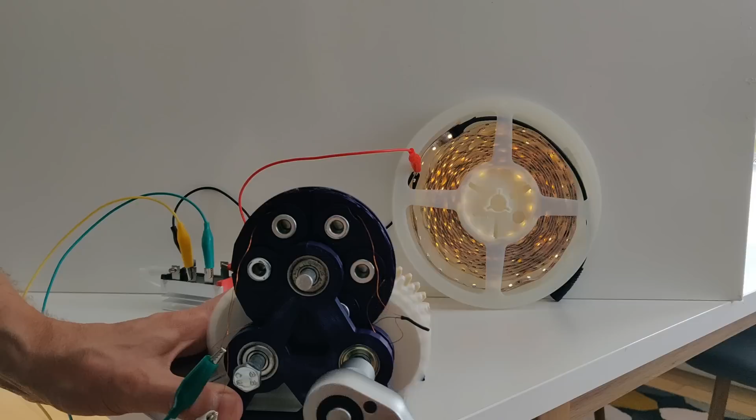In this video, I'll demonstrate how to build a 12 volt generator, just like this, from easily accessible parts, most of which you can get for free. It's a video meant for beginners, so I'll demonstrate the build process as well as go through the basics of how and why it works. Let's get started.

Here's the part where I talk about how and why it works. Please note how this video is split into different chapters. You can easily skip this part if you know all you need to know about electromagnetic induction.

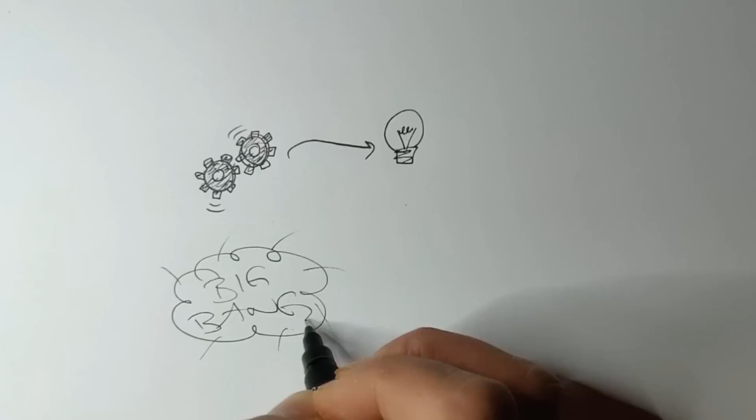A generator creates electricity from a mechanical motion, in this case of our generator, the turning of the gears and rotor across the stator. When we say we create electricity, it sort of implies that we create something where before there was nothing. But all we really do is turn one kind of energy into another. All energy in the universe was created at the time of creation, and all we've done ever since, and probably ever will do, is turn one kind of energy into another kind.

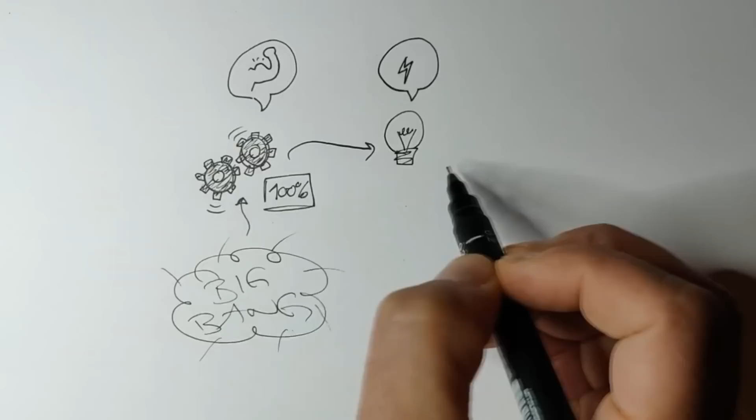In this case, we turn our physical input into an electric output, so we can also think of a generator as an energy translator, in much the same way as a motor translates electrical energy into movement. We can never get more energy output than what we put in. That's just the way the laws of physics govern. We can only try to minimize the energy loss in the generator between the input and the output, and there will always be some energy loss. Again, the laws of physics at work.

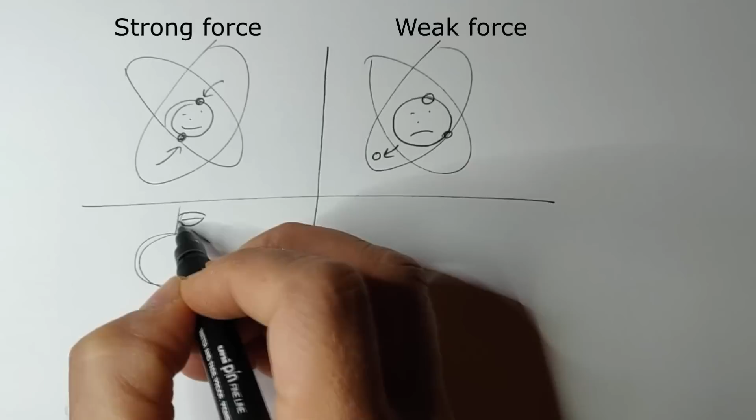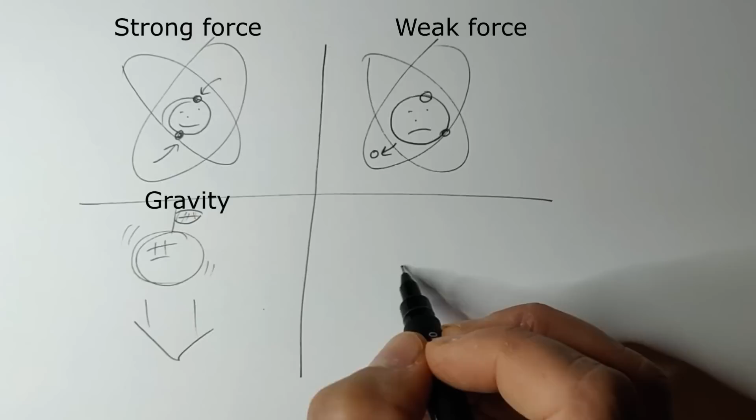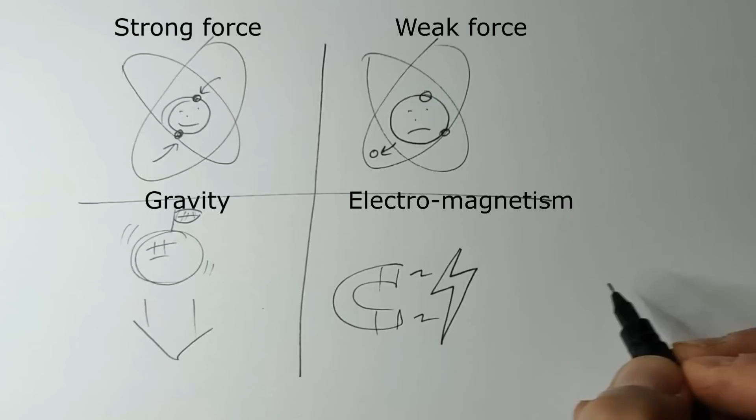The forces at play in converting our physical movement into electricity is known as electromagnetism, and it's one of 4 fundamental forces of nature that govern how the entire universe works. You have the strong force that determines how fundamental particles in atoms are bound together, or the weak force that determines how they decay in microseconds or millennia. And of course, we have gravity that dictates how everything else aligns together, from vast galaxies to apples falling from trees. And then you have electromagnetism that basically governs how everything else interacts. The principle we're most interested in, generator-wise, is known as electromagnetic induction.

Electromagnetic induction works by creating a changing magnetic field around an electric conductor. The easiest way to demonstrate this is by moving a magnet back and forth across a wire coil. Inside the wire we'll have a bunch of atoms, and these atoms have a core, a nucleus it's called, and this nucleus has a bunch of electrons that whirl around it, and this creates a tiny magnetic field. You don't intrinsically get electricity from just the wire itself, because the electrons spin in random directions and their magnetic forces cancel each other out. So until a magnet comes along, it's just a boring coil.

Magnets have their molecules arranged so that their electrons spin in the same direction. This creates a uniform magnetic field, and when we move a magnet across a wire, all those electrons in the magnet will push, or induce if you will, the electrons in the wire to move in the way of the magnet. Some of those electrons will be pushed loose from the atoms, and it's this displacement of all those free-roaming electrons that ultimately creates the electricity. All this is vastly simplified, of course, but that's basically the idea.

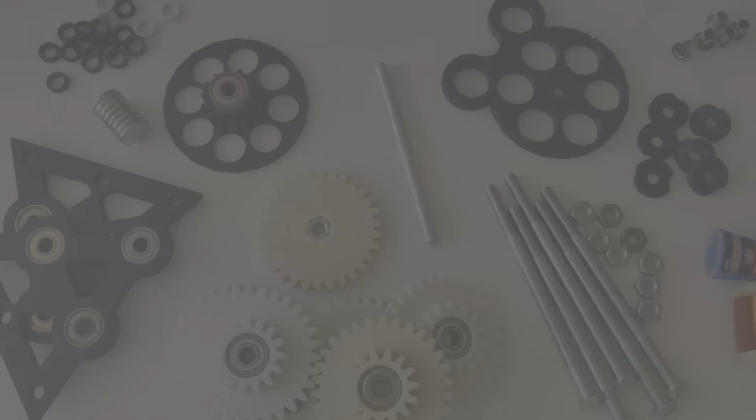First, the parts. 3D printed gears. 6 of them are so-called compound gears, which means they're actually 2 gears joined together, a small one and a big one. Each gear needs 2 bearings. Later in the video I'll show how to get these for cheap or even free. One initial gear is not a compound gear, it's just a single spur gear. This one doesn't need a bearing. Instead there's room for a hex nut, an M8 hex nut to be exact, in the middle of it.

This gear is the one that sets all the other gears into motion, and it's set with a hex nut in the middle so as to hold tight onto the bolt that makes up one of the two shafts of the gearbox. You'll get the idea later on when we assemble it, but basically I'm using bolts that aren't fully threaded to stop the hex nut from traveling too far up the bolt.

And the reason why I do this is because this gear needs to be fixed to the shaft, and this is usually done by drilling through the shaft and inserting a pin through it. But that's just very hard to do precisely if you don't have access to a decent stationary drill press. But most people don't, and it can be a difficult and error-prone process. So this is an easy way to avoid that problem altogether.

5 M8 times 130 millimeter partially threaded bolts. To be exact, they should be quarter threaded, meaning 28 to 30 millimeters of thread on the bolt. These should be readily available at your local hardware store. An 8 millimeter push rod will do just as well.

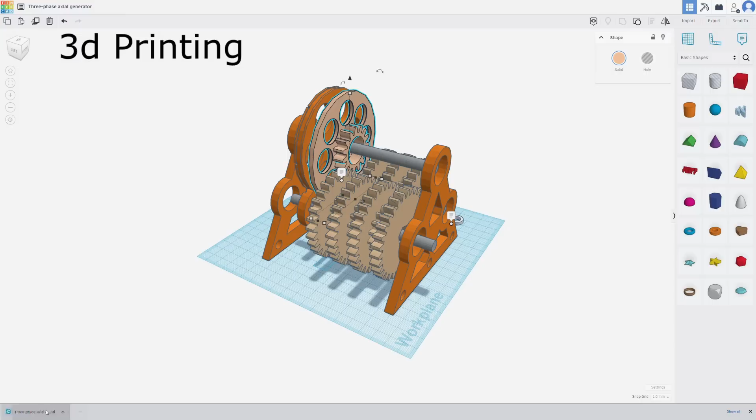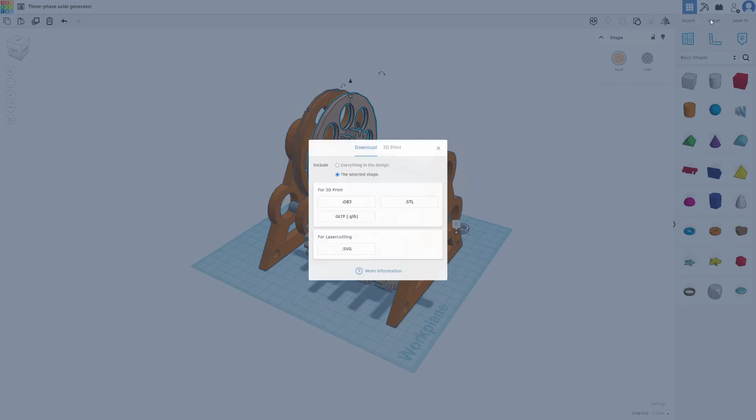Now on to the 3D printing. The generator is designed in TinkerCad and it's available for free in the description. Don't fret if TinkerCad is something you haven't tried before. You don't have to know how to use it to print the design. Simply click on one of the elements and press the export button in the top right corner. Then proceed to select the STL format that your 3D printer software, or slicer as it's known, will know how to process into something your printer will be able to print.

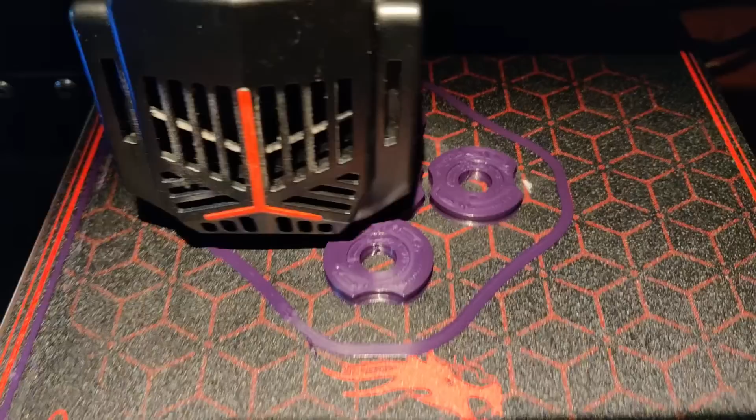Then just print away. I'm using the Ender 2 Pro here, which is a mini desktop printer with a not very large build volume, but the design will fit into it without problem. It's a great printer, it's dead simple to use and has never failed me.

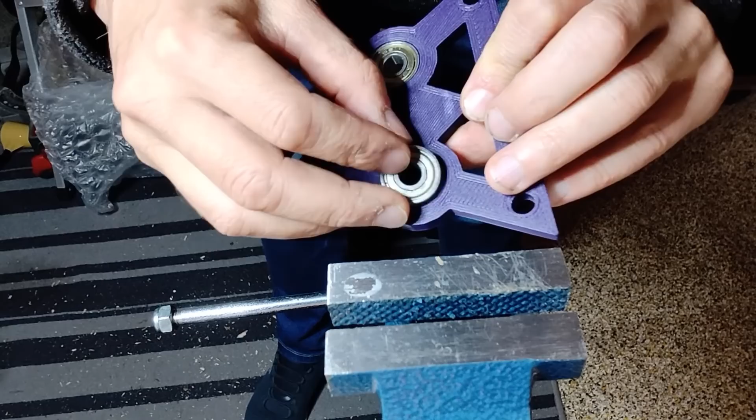I highly recommend it. One thing to note is that I deliberately made the fit for the bearings very snug, so they will stay put. This means that you have to apply some pressure to get the bearings in there. I recommend using a vise, but if you don't have one, you can just as easily hammer the bearings into place. Just use a piece of wood and don't hammer on the bearings directly. Same thing with the hex nut for the initial gear. It's a deliberately tight fit.

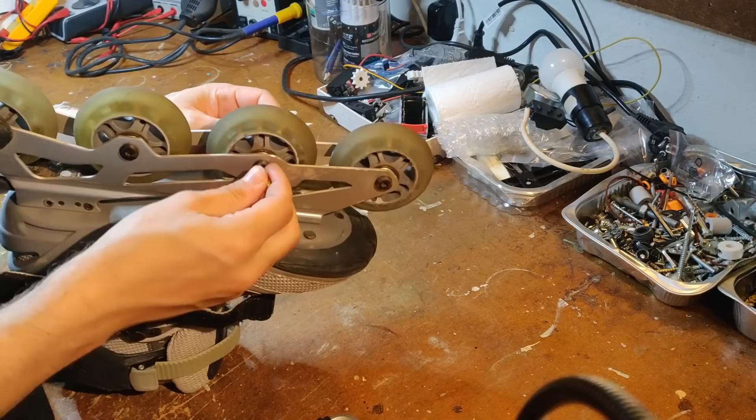About those bearings, let's quickly go over a great method for getting them for free. The bearings we need are 608ZZ bearings at 22mm diameter. Pretty standard stuff, and if you happen to come across a pair of discarded roller blades, I've found these to be an excellent source of bearings.

For this set of roller blades I get 16 excellent bearings. It doesn't get much cheaper than free. I also get these metal spacers. These will come in very handy when it's time to wind the coils of the stator, as I'll later demonstrate.

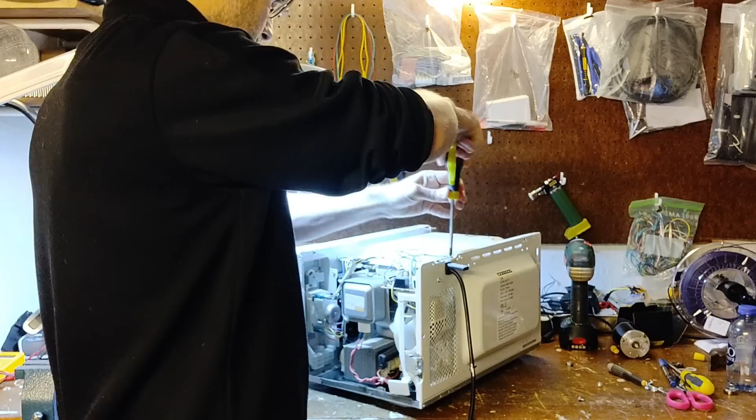Copper wire, or magnet wire as it's also called, is very easy to get hold of. Discarded appliances are usually a great source of the stuff, such as this discarded microwave oven, for example. Although the motor is shot on this one, there's still a load of useful parts we can source for our projects, copper wire being just one of them. Looks like 0.1mm wire, probably 50 or 70 feet of it, all from just the oven fan.

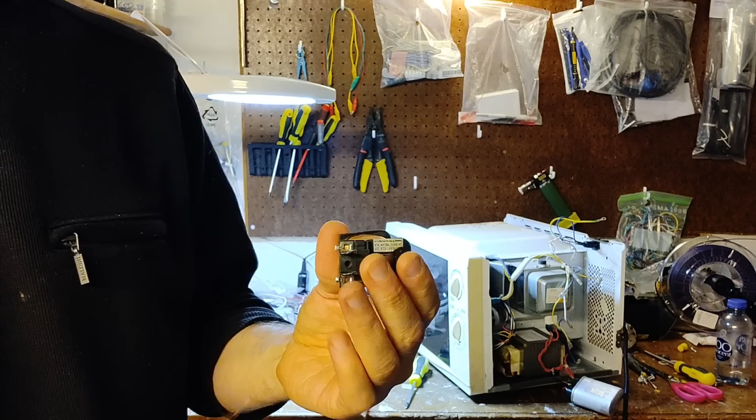If you haven't handled copper wire before, you are perhaps wary of breaking it, but there's no need to be overly concerned. It's quite durable, and the enamel coating that acts as insulation doesn't easily come off.

Such is the state of the world that we throw away too much stuff that could otherwise be easily reused. Take this component board with its relays and capacitors and whatnot, all likely in good working order. I encourage everyone to reuse and recycle whenever possible, but that's a sermon for another day. For now, let's put the copper to use and wind some coils.

We'll use the 3D printed caps from the TinkerCad design. They fit right into the stator, as we'll see later. But we need a core that we can wrap the copper wire around. I got these metal ones from the pair of rollerblades I took apart, but rest assured there's a 3D model of these cores also in the TinkerCad design, so you can just 3D print them if you don't have a pair of rollerblades to dismantle.

Just be aware of the important difference between a metal and a plastic core. The metal core will generate much more electricity, but make it harder to rotate the gears because the metal slows down the magnets. The plastic core will generate less electricity, but the generator will be very easy to rotate because there's no metal to interfere with the magnets.

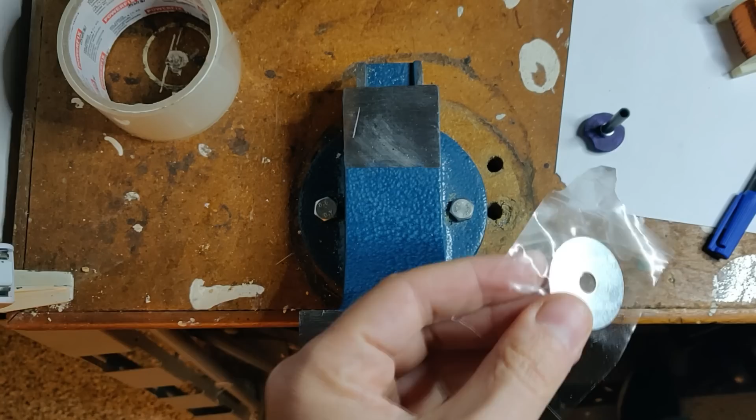With the core in place into the cap, we can roll the wire around it, but we need a backstop of sorts so the wire won't fly away from the coil as we roll it. I mount the coil on one of the black socket screws I got from the rollerblades, but you can use any kind of rod or bolt that will fit. Then I use a washer as a backstop, as tight a fit as you can find. I tape it up beforehand. This makes it easier to reuse it with the other coils you need to make. Then we fix it into place, ready for winding.

We need a bit of loose wire for our stator later on, so allow for a few inches of copper. Fix the loose end to the mount with a bit of duct tape or similar. And then we wind away. 50 turns of wire with each iteration, and with 0.1mm wire we need 400 turns in total, or as many as you can fit inside the cap. Don't wind beyond the cap's boundaries or you won't be able to fit it into the stator.

After every 50 turns I pause and write down the total number of turns, because I get easily distracted and don't want to lose count. Then I apply super glue or crazy glue to the coil to hold it together. Careful you don't glue your fingers together. For the sake of argument, let's just pretend I never did that.

And so we wind and we wind and we wind and glue and wind again. And in the end, you'll get the 400 turns down, and we can fix the end of the coil with a bit of duct tape and wait for it to dry. When the glue has settled, we can take it apart. It does take a bit of force, but it should come off, and you should end up with a coil that looks similar to this one.

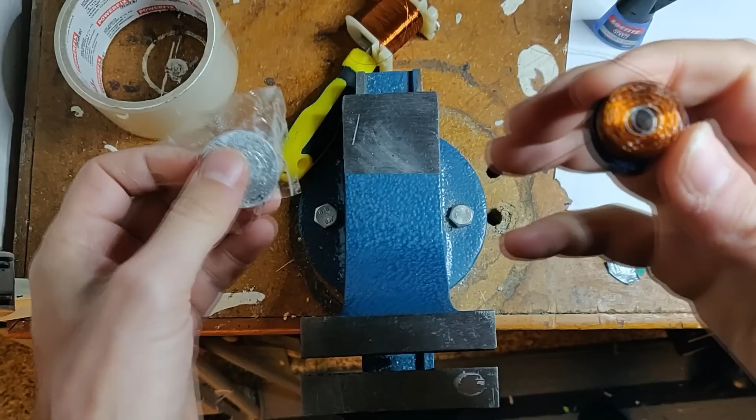It is not unreasonable to expect to have to do a bit of experimenting with the coil winding. Your setup likely won't be exactly like what I have here, but that's not terribly important. We just need to get as many turns of copper in as possible, and you need to wire the same number of turns with each coil.

So we have the coils and we have the stator. Now, by way of the design, the coils are meant to be inserted into the stator. If you look closely, you can see the flange on the cap. It should fit right into the stator body and click into place.

Now it's time to connect the coils together. We can't connect the coils just like they are because the copper wire is insulated. To be more precise, it's actually coated with a form of varnish. The coating is very thin, but we need to get rid of it to get to the actual wire beneath it so we can connect the coils.

The trick to get rid of the insulation is to simply burn it away. A lighter should do fine. Just hold it to the tip of the wire and the insulation vanishes. You're left with a bit of black stuff. You can use your fingertips to get rid of some of it, but the rest will have to be sandpapered away. Gently apply the sandpaper to the tips.

Use as fine-grained sandpaper as you can find, and only move the sandpaper away from the wire. Going back and forth, as you would normally do with other tougher materials, will likely damage or even break the wire. Beneath the insulation, the copper wire will appear, a strand of wire much brighter than the coating.

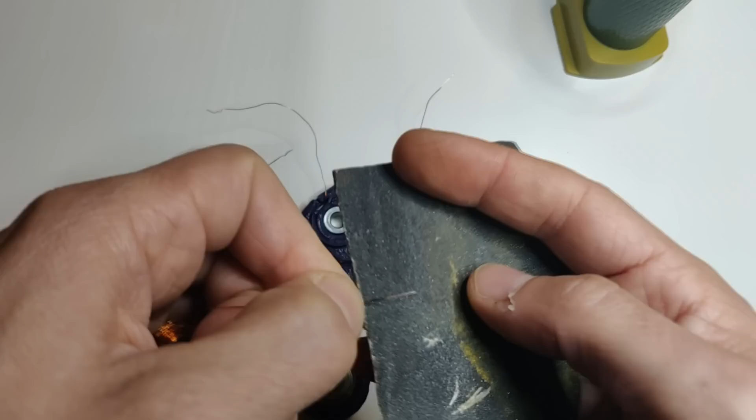It's difficult to show it here because the wire is so thin, but you will be easily able to recognize it when you have a go at it yourself. Remember to cover all the sides of the wire. You want as much copper exposed as possible to get a good connection.

The magnets will rotate around the surface of the stator and excite the coils, inducing electricity. We just need to figure out the best way to extract it. We could connect all the coils in series from one to the next all the way around. That's known as a single-phase generator, but it's also not the most efficient way of going about it.

What we'll do instead is wire the opposite coils in series. As there are 6 coils, we get 3 series or phases. Indeed, this makes the generator a so-called 3-phase generator. It's a more efficient way of generating electricity, and indeed the 3-phase generator is the workhorse of the modern power generation arena. So we'll do the following.

Leave one end of the coil sticking away from the generator. This we consider the start wire of the coil. Locate the other end. This is the end wire. This end wire must be connected to the start wire of the coil exactly opposite, and the end wire of that opposite coil should stick away from the stator. You decide for yourself which wire of the opposite coil will be your start wire and end wire. That's not terribly important.

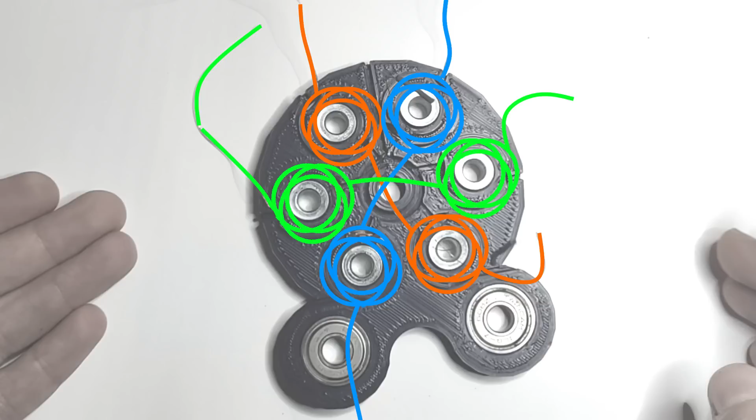I know it can be difficult to see here in the video, so I'll refer to this image for clarification on how to wire the stator up. I color-coded the three individual phases. The only thing to note is that we have to connect coils opposite each other. We can't connect them side by side.

This is a good time to test the connection. If you have a power supply or battery, you can test it through the coils to a measuring device or small LED light or similar.

The magnets will whirl around the coils and induce electricity, in effect creating 3 different streams, if you will, of alternating current. The coils do seem rather exposed, and there's a risk they could be knocked out of their sockets by the fast spinning magnets.

To alleviate that risk, I wrap the front of the stator with clear packaging tape. It takes a bit of work with the scissor or Stanley knife, and one must be careful to not damage the coil wires, but it's worth doing. And that's it for the stator. Now on to the rotor.

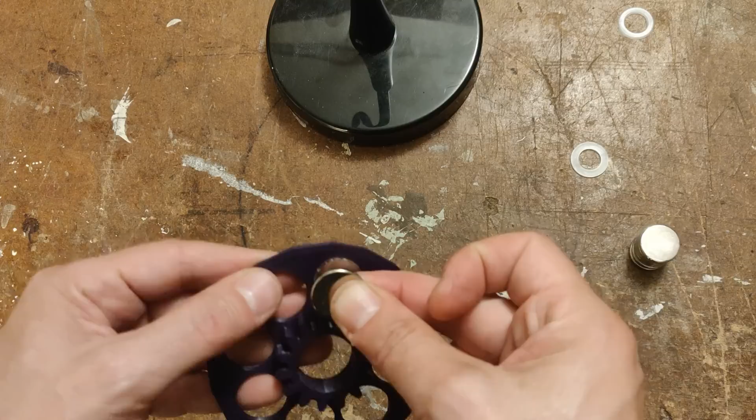Contrary to the stator assembly, the rotor is much easier to put together. I designed it so that the magnets can simply be pressed into place. Apply a bit of force and they pop right in and stay there. These are neodymium N52 20x3mm magnets, and I specifically designed based on these ones. If you have other sizes, you can adapt the TinkerCad design to fit your ones, if you have knowledge of how TinkerCad works, that is.

The only important thing to note here is that you absolutely must insert the magnets in reverse polarity order. First, add a magnet with its north pole facing upwards, then the magnet beside it must have its south pole facing upwards, and so on and so forth. If you don't do this, the magnets will not induce sufficient alternating current into the coils, and you won't get much electricity flowing.

I recommend adding 1 magnet at a time and testing the polarity of it to the magnet next to it. If they repel each other, you have the direction right and can continue to press it into place. If they attract each other, you must turn it over, make sure they repel each other, and then insert it. Then just keep going until all the magnets are done. Then you can test with a smaller magnet if you have one. Each magnet on the rotor should alternate between attracting and repelling it. If you got one wrong, simply pop it out and turn it over and put it back in.

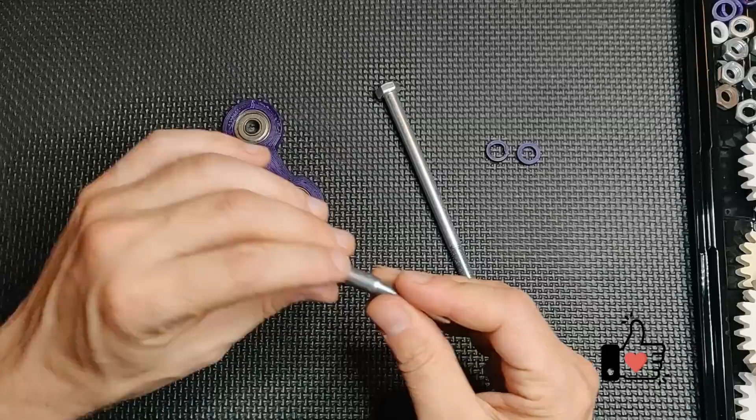And that's our rotor done. All parts are now in place, so we can assemble the generator. And here are our parts. First off, we secure 2 bolts to one of the end plates. Place 2 washers on each of the bolts before passing it through the center bearings. Then place 5 washers on each bolt in preparation for the stator.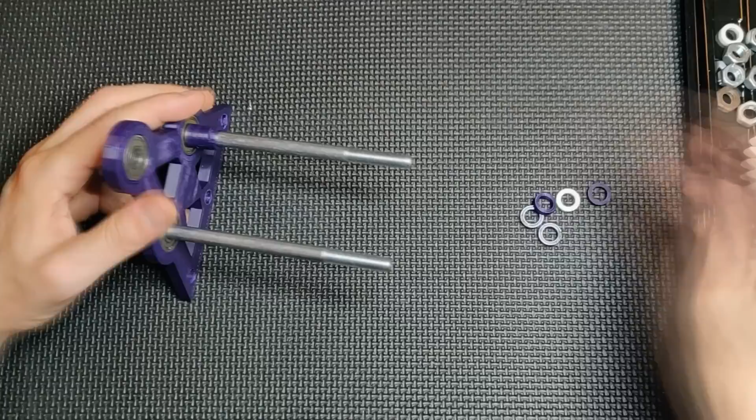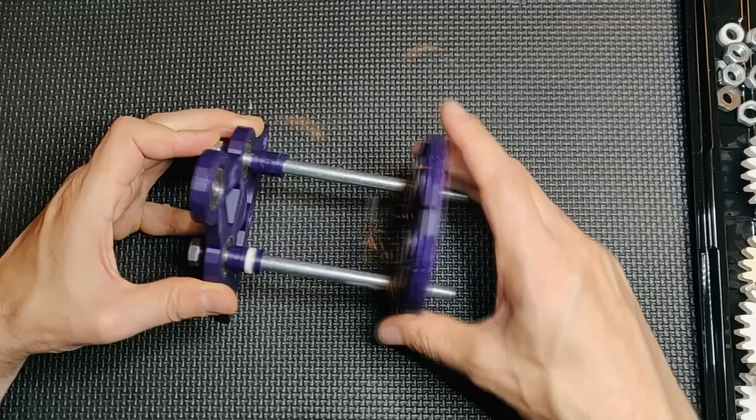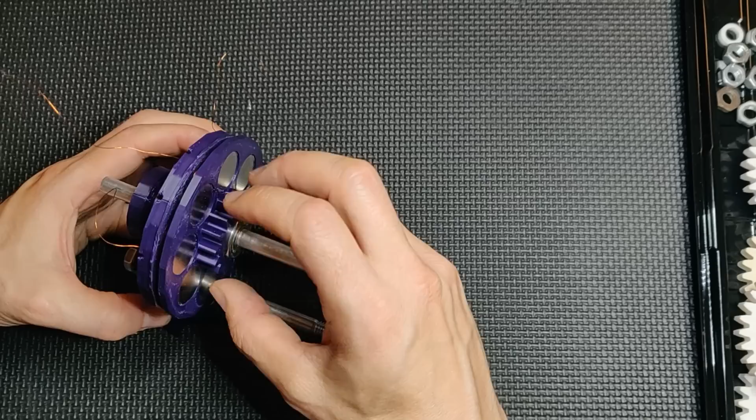Then add the stator through the center bearings. The coils should face inwards, not outwards. Fix the stator in place with the aluminum rod or a 3D printed plastic rod if you don't have an aluminum one. Add 1 washer, then the rotor. If the cores of your coils are metal, you'll feel the rotor magnets adhere to the stator. The rotor should spin freely no matter if the core of the coils is metal or plastic.

Now more washers. Add 3 washers to the bolt where you want the first gear to engage the rotor. Then slide the gear into place. 1 turn of that gear equals 1 turn of the rotor. We say it has a 1-to-1 gear ratio. Add 6 washers to the adjacent bolt and 1 more gear. One turn of the second gear will turn the rotor 2 times. We say it has a 1-to-2 gear ratio.

Keep adding gears with a single washer in between. As you add more gears, the rotor will double in speed for every gear added, as the gear ratio becomes 1:4, then 1:8, and so on. A fast rotor yields more electricity, but it also comes at a cost. We can't just keep adding gears, because the more we add, the more power is required for them to turn. With each gear doubling the gear ratio, that quickly adds up, and soon we won't be able to turn the gears at all.

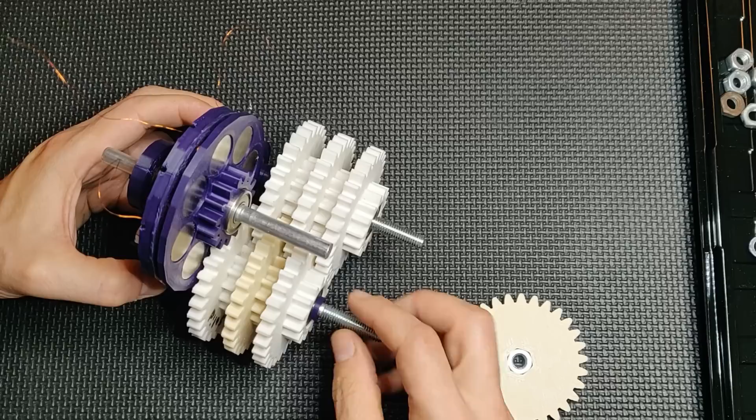With 3 gears on each side, it's time to add the fixed gear. You should have a 3D printed gear with a fixed hex nut pushed into it. Rotate it on the bolt until you can't rotate it any further, because another gear will be in the way. Not a problem. Simply turn the bolt instead of the gear, and you'll be able to slowly mesh it into place. That's it for all the gears.

Add 2 final washers and place the second end plate. Then slide the aluminum rod into place. It can be a tight fit. Make sure to take your time. All the gears should spin freely. If they don't, trace back and make sure they do before closing up with 2 hex nuts on each end of the bolts. Allow for a bit of space between the end plate and the hex nuts. You mustn't tighten the nuts into the bearing of the end plate.

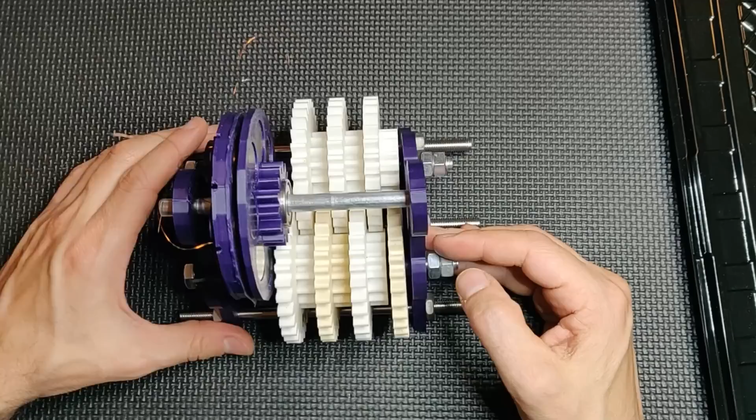That's the bulk of the generator. All that's left now is to stabilize the device with the 3 remaining bolts or push rods. Push or screw them into place and fix with hex nuts. And that's it. The generator is complete. With a bit of effort, you can turn all the gears by hand. Notice how a fraction of a turn of the hex nut gear results in many turns of the rotor because of our gear train. Let's test it out and see what it can deliver.

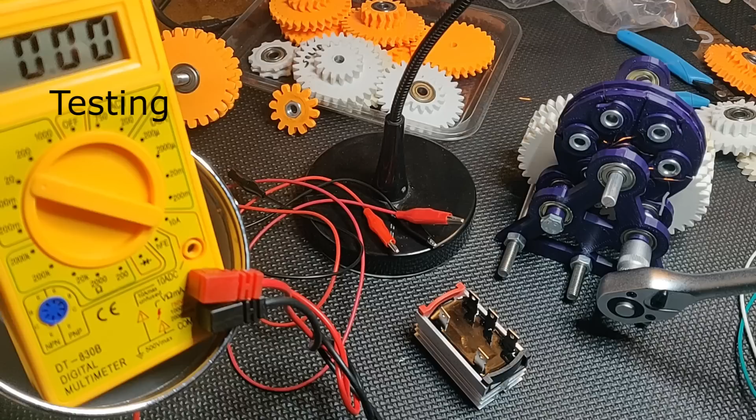Here is the generator ready for testing. The activation is simple. Just turn the drive bolt with a ratchet or wrench.

You have to spin away from the generator because of the way the hex nut gear is applied to the bolt. If you spin it the other way, the gear will come loose and travel away. Just rotate it back into place. As we rotate the bolt, the gears will spin and turn the rotor, generating electricity across the stator. Specifically, we get the aforementioned 3 streams of alternating current, each stream exiting from each exposed coil wire strand.

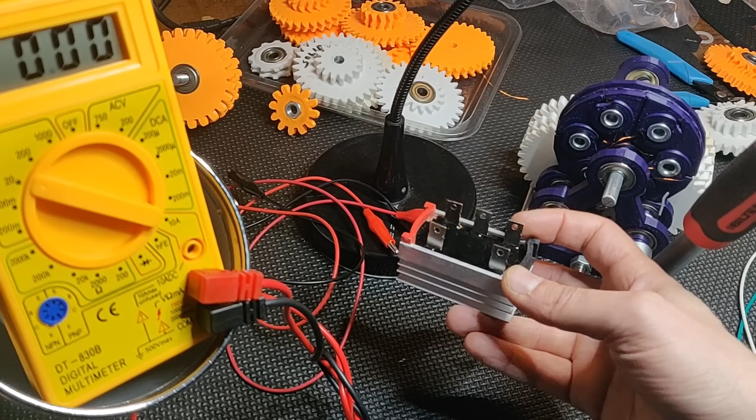We need to convert these 3 streams of alternating current to 1 stream of direct current in order to drive anything useful. What we need here is a so-called rectifier, like the one I show here. We have 3 input lines for our 3 alternating current streams and 2 output lines for a plus and a minus pole of direct current or DC. Let's hook it up. The order of the connection isn't important. Just pick a wire and go from there. We'll hook up the direct current plus and minus to a voltmeter so we can get a reading.

Let's see what kind of voltage the generator will deliver. Hold the generator down while turning it. The force is strong with this one. 4 volts, 8 volts, 10, 12. We peak at 12.11 volts. That's not too bad for very little physical effort. But volts only tell half the story.

We need to measure current, or amperes as it's called, to see how much the generator delivers in terms of power. If you're unfamiliar with volts or amps, there's a great beginner's analogy in how water flows through a pipe. Think of volts as the pressure of the water through the pipe. 12 volts of pressure will line up with electronics that need at least that kind of pressure to function, like a fan or phone charger. But we need those volts flowing through the wires, and that flow is measured in amperes or amps. So if volts can be considered the pressure, amps can be considered the flow rate.

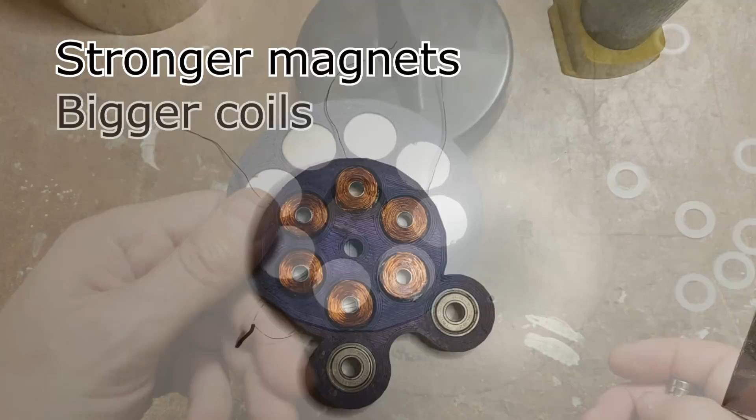It's not very difficult to generate electricity. The trick is to generate enough of it to drive something meaningful. This small generator can deliver enough to power lights or charge a phone, but that's about it. But it's also very small. If you want more power, simply scale it up. Beyond that, here are some optimization tips. Use stronger magnets. The stronger the magnets, the more bang for the buck. Wind bigger coils. The more copper you can get in there, the more electricity you'll get. Trade thin copper wire for more volts, thick wire for more amps.

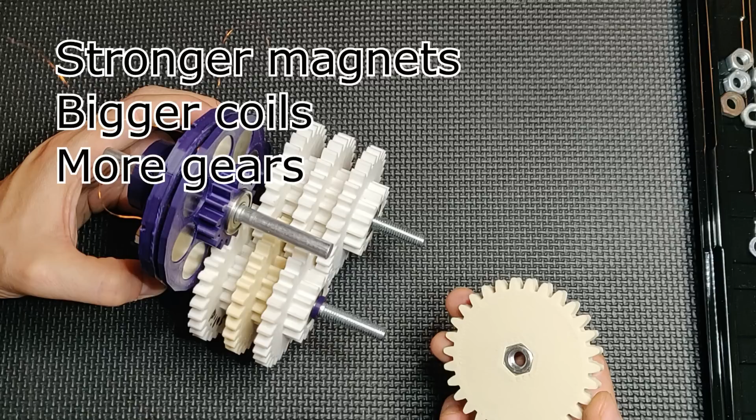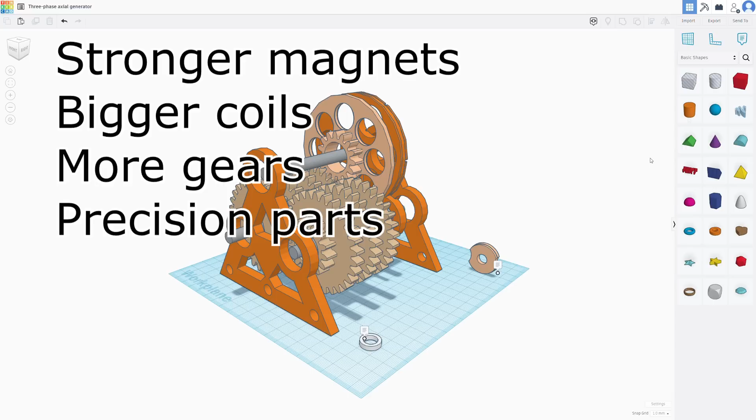Add more gears. More gears mean more turns of the rotor equals more electricity. Of course, more gears will make it harder to drive the generator. Everything's a trade-off. Cut precision parts. 3D printed parts tend to warp and otherwise degrade. I deliberately made the parts flat, so if you have access to a laser cutter, you can cut the parts instead of printing them. Sadly, I don't have access to a laser cutter myself, but that would certainly be a tremendous efficiency upgrade.

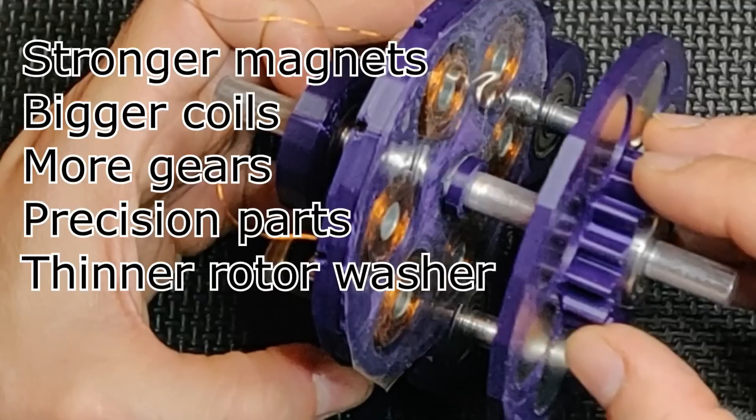Minimize the thickness of the washer between the rotor and the stator. This brings the magnets of the rotor in closer contention with the stator, and that will substantially improve the amount of generated electricity. That will also make the rotor that much harder to spin, so once again, a trade-off. Everything in mechanical engineering is a trade-off, or indeed everything in life itself, if one gets philosophical about it. And that's it for now.